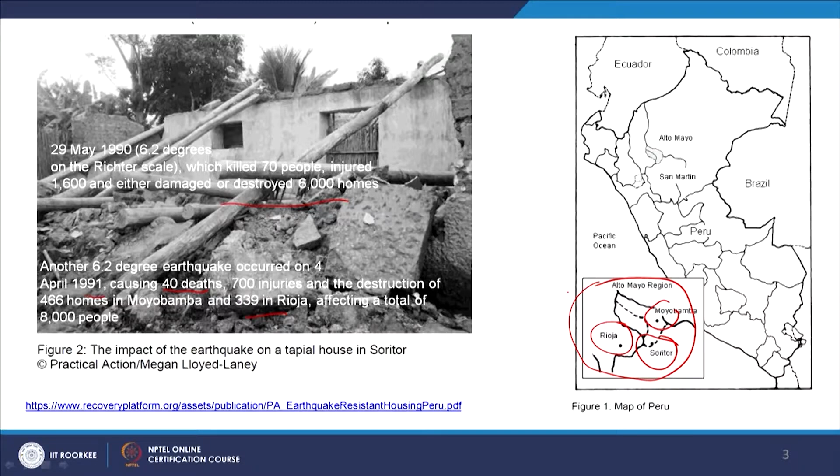So this is the Alto Mayo region. This work was carried out with the Practical Action Group, which focuses mostly on the recovery process - mainly long-term reconstruction rather than short-term relief.

How did they account for the beneficiaries? Obviously based on various surveys and feedback from local residents and leaders. They calculated the whole expenditure, the kind of requirements and needs assessment done, and then identified the potential beneficiaries.

From the architectural aspect, after a consultation process with local leaders and various stakeholders in the region, they decided to discard the use of rammed earth and adobe, promoting the quincha timber frame instead as a better earthquake-resistant material. The Practical Action Group developed a plan with timber posts in between, called quincha construction.

What you can see here is timber studs embedded either in the concrete bedding or deeper into the foundation. This whole wall is like the wattle and daub sort of construction - a bamboo screen is woven, then the first coat of render is applied, followed by a second coat of render later on the bamboo screen.

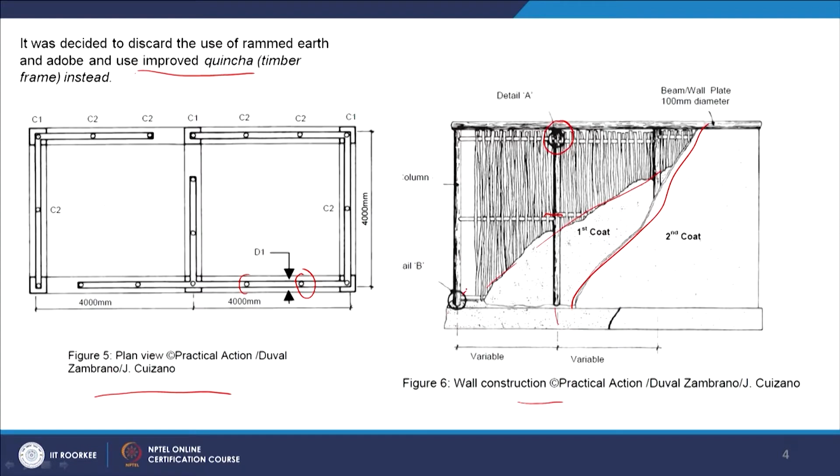If you look at detail A, this junction and this junction are the two key junctions. You have the 100mm diameter post, and the horizontal stud is embedded within it. There's also a recess at the bottom that goes into the wall base, as well as a 50mm diameter fixing for the horizontal stud. So this is the kind of detail that has been implemented.

The technical group also suggested various specifications: concrete pad and strip foundations should have a mix of 1:10 cement plus aggregate plus 30% large stones, and the concrete wall base has a mix of 1:8 cement and aggregate, with structural quality wood poles. For the render, the first coat mixes mud to straw, 100kg to 50kg, and the second coat is cement to lime, sand, or sieved soil as per standards—1:1:5, or cement to gypsum sand. These are all by volume.

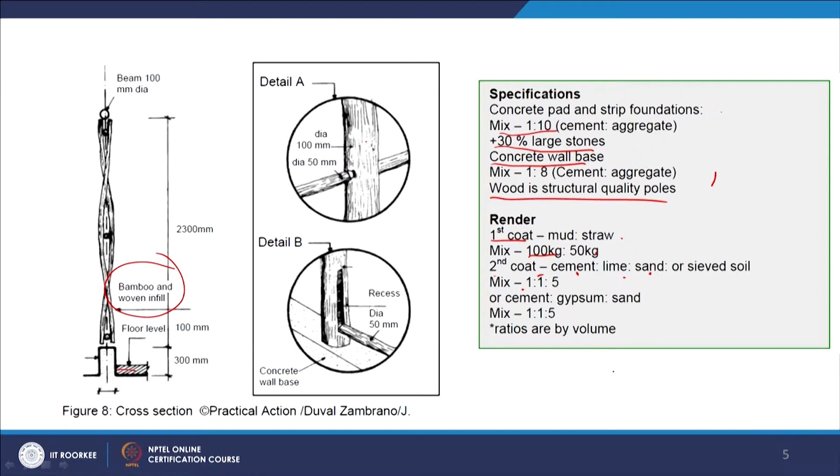What are the benefits of this quincha construction? First, they upgraded this type of construction by embedding concrete aspects and concrete foundations, which provide greater stability against earthquakes. The wooden columns are treated with tar or pitch to protect against humidity, and concreted into the ground with nails—these nails are embedded at the base to give extra anchorage.

They also use concrete wall bases to prevent humidity from affecting the wood and canes in the walls, along with careful jointing between the columns and beams to improve structural integrity. In the next slide you can see how carefully the joining of the beams and columns has been done, because that ties the whole building together and ensures the structure performs better during an earthquake.

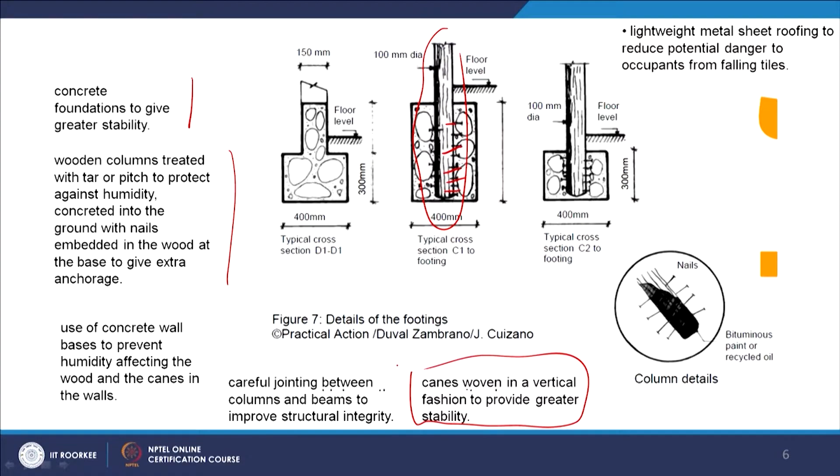When the canes are woven in a fashion, it not only gives an aesthetic character but also structural stability. For the roof, they used lightweight, probably galvanized metal sheets to reduce the danger from falling tiles. Earlier there were tile or adobe roofs, so when the building shakes, stones used to fall on people—that's why they went for lightweight materials.

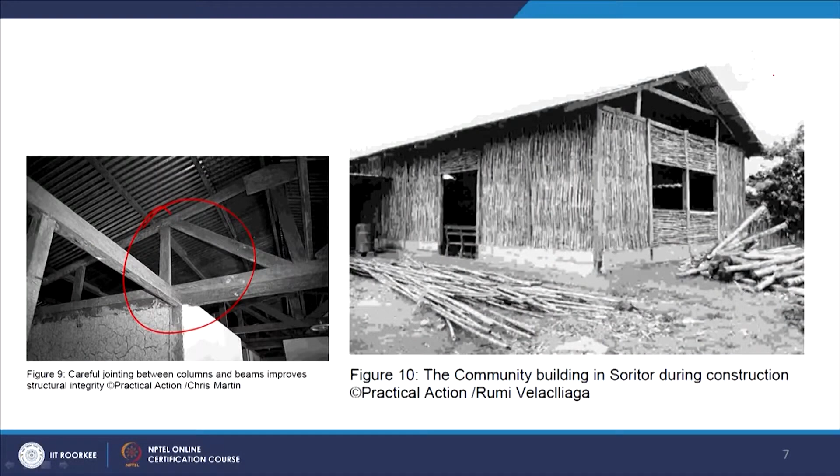What you can see is a community building in the Soritor area. They tried to upgrade this technology by first constructing public buildings like schools or community buildings, so people could become aware of this technology. They could also give masonry training sessions to local people so it can spread out to other places.

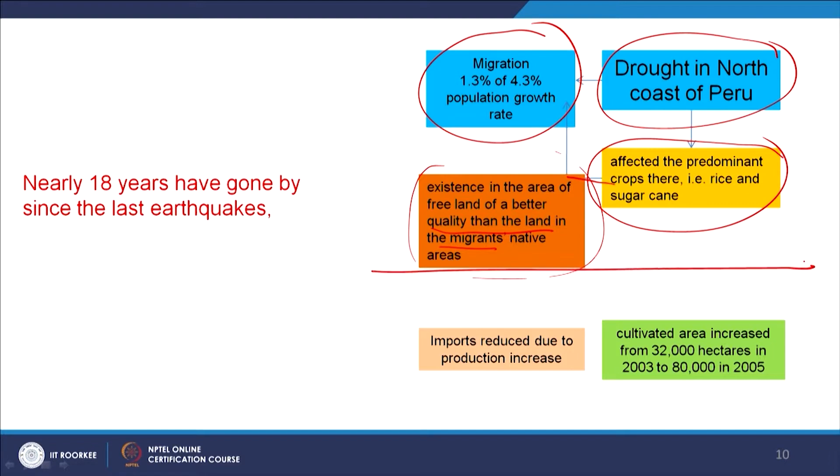About 1994, when we see the migration, out of 4.3% population growth, 1.3% was contributed by the migrant population. Considering these conditions, the government was motivated and encouraged to enhance the production of feasible cultivated areas, and promoted certain schemes, encouraging people to work on the possible cultivated areas.

So from 32,000 hectares in 2003, it became 80,000 hectares in 2005. It more than doubled, and production increased, while imports from other places decreased.

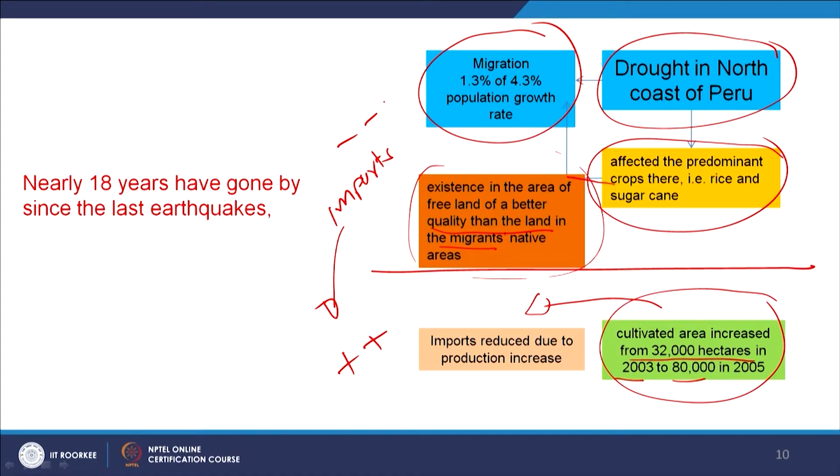This is one of the important considerations, because people are getting a better economic status. In the beginning it started with a very participatory approach, but now because the economic status is making them independent, they are able to take some decisions. Earlier local government was not playing a part, but now gradually local government has also taken part of the whole process, and the economic status is actually supporting that.

So the migrants have also created problems. They started settling down on plots and outskirts of the towns, increasing their savings, and thus creating a demand for more housing and services, because the more migration keeps coming, that is where the demand for housing grows, which means they are forming new settlements without any previous planning.

And this is where one of the important aspects is deforestation. 1.33 million hectares have been deforested with this migration process, comprising nearly 27% of the total area. And now that is where we are talking about the indirect impact on climate change aspects, which may result in the shortage of water, which will again turn into a cycle having an impact on agricultural aspects.

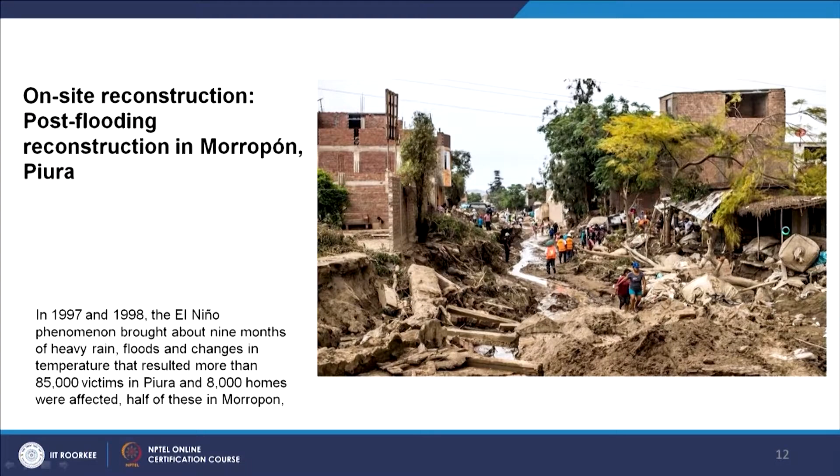Being an agricultural sector, this particular region is rich in agriculture. So in the reconstruction process, they looked at how to prevent further water shortage, and dams and irrigation projects have been built.

Also for housing, the construction system used concrete foundations with 1 meter footings to prevent possible floods, built with improved quincha. Again, they used the quincha timber frame with the active participation of the local population and local materials, incorporating community participation.

Being an agricultural family-based area, the whole idea of urban planning is to reduce vulnerability and centralize water and services. This is where all the housing complexes are built on about 200 square meter plots.

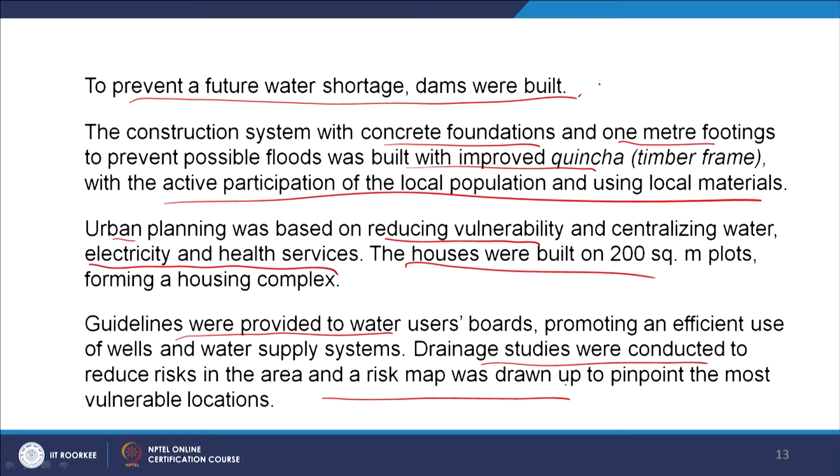They have also been provided with technical guidelines on how to use water and promote efficient use of wells and water supply resources. Risk mapping has been done through drainage studies, and certain vulnerable locations were identified and communicated to the people. This is how they mostly emphasized the water and irrigation services aspect.

Now what happens here? Today, the situation is very colorful and very cheerful. People have planted flowers and made their small gardens, and they also developed their own systems adapted to local conditions. Since they had tin sheet roofing, with this advanced, upgraded quincha system, they have also adopted certain local techniques and tried to modify their dwellings.

So that is where, in any response, personalization is a very natural response, both to climate aspects as well as cultural preferences.

The fronts have been taken care of because they have painted murals with drawings like birds, mermaids, and geometric figures. This actually shows they have made private gardens out of it, looking into the green concerns. This shows that the community's self-esteem has been considered very much, and that is how the participation has ensured they have taken this self-esteem forward.

I'll also discuss the third case, which is an on-site reconstruction again, post-earthquake reconstruction in Chuschi and Quispillacta, Ayacucho. This is an adobe house. What they did was adopt an approach, because across these 5-6 settlements, poverty is one of the common factors.

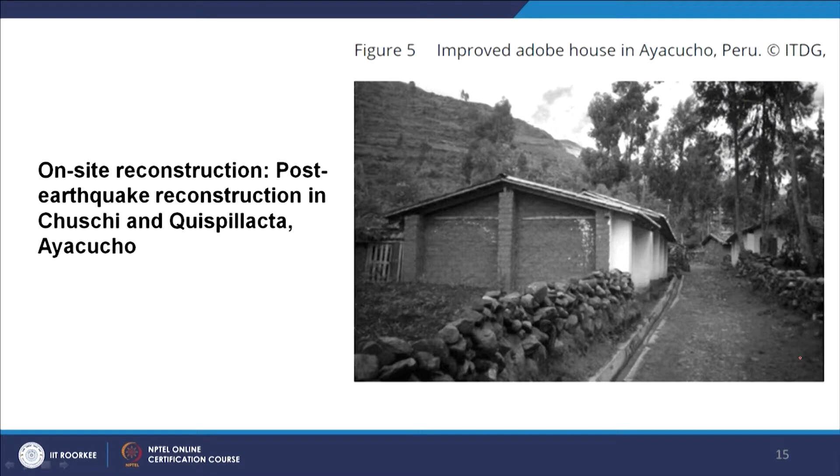Here what they did was train people in making adobe square blocks and train them in building these adobe houses and how to make improvements on them. Again here, they consulted the people about the beneficiaries and involved all the people in building these houses.

But what we see is there haven't been many improvements made in public areas. The streets have been gradually deteriorating, the stone parts have uneven paving, and ditches have not been cleaned, which means there is negligence in the public space itself.

But one interesting thing is people have invested time and effort to actually build this particular carved stone church in Quispillacta, which is a positive sign.

But somehow it has not been taken into the overall scheme, how the same energy could have been better used in making this. So this is one thing we can learn from this.

Why does it happen like this? Because people have become dependent and have lost their dignity and self-esteem, since state institutions have been providing whatever they needed. So participation has gradually come down, and they became mostly dependent on state institution support, looking for external support or cooperation. The traditional form of community work was called ayni, a kind of give-and-take process in the South American continent. They have this traditional system, but it has gradually been destroyed, and the efforts, actions and intentions of development have been wasted. So despite having this kind of energy, they were unable to invest it holistically.

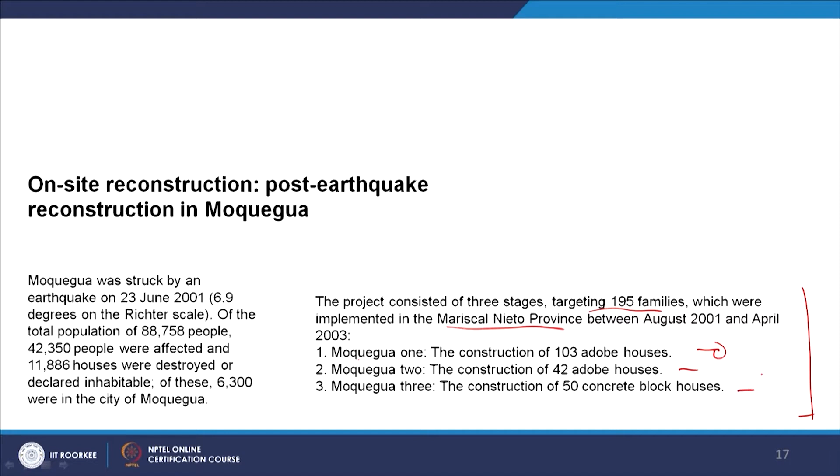There are 3 stages. They targeted about 195 families, implemented in Mariscal Nieto province between 2001 and 2003. In Moquegua 1, they constructed about 103 adobe houses, 42 houses in stage 2, and 50 concrete block houses in the last stage. Here they also looked at involving the community in the recovery process, and made modifications according to their needs. What you can see here is this has been very successful.

Here, because of the mining aspect, the local government also received mining fees, which in turn were used to provide city services and make investments in the community. So there was community participation in controlling and efficiently planning the distribution of funds. Mining, being one of the richest economies, also supported facilitating these services.

Both the houses of concrete blocks and adobe remained in good condition, and in both cases it has been technically guided and they remained in good condition.

This is where they also implemented one more innovation. Indoors, the roof has been built with concrete truss beams, which are an innovation, and another innovation called tumbadillo, a cloth cover placed under the lower part of the roof to reduce the heat and give a better appearance. They tried to cover a cloth under the roof so it can reflect the heat and make the indoor environment a little cooler.

When people are participants in this, when the economy gives support and the local government provides technical support for a safer environment, that is where the urban investments come in. What you can see here today is that the streets are paved, the civic center was built, public areas are pleasant, and children's playgrounds—everything has been taken care of.